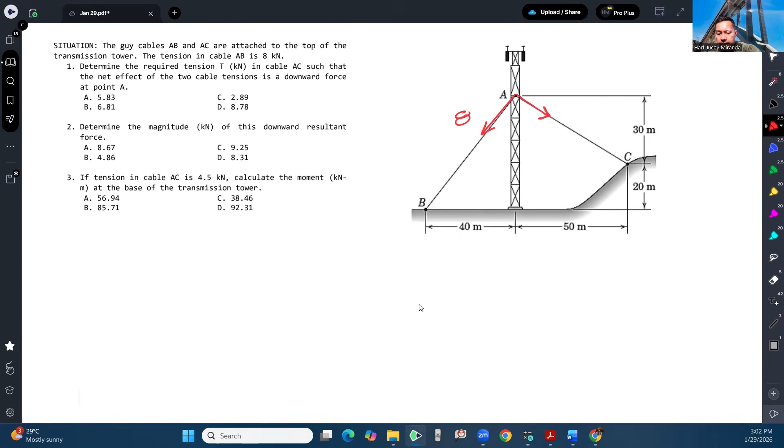Okay so una, given na yung tension sa AB, which is 8. Ang tinatanong, ano daw yung dapat na maging tension sa AC? Tawagin ko na lang na TC, at tawagin kong TB yung sa AB.

Para yung net effect daw nila downward. So ibig sabihin, ang ibig niya sabihin dito sa net effect, ibig niya sabihin dyan is yung resultant.

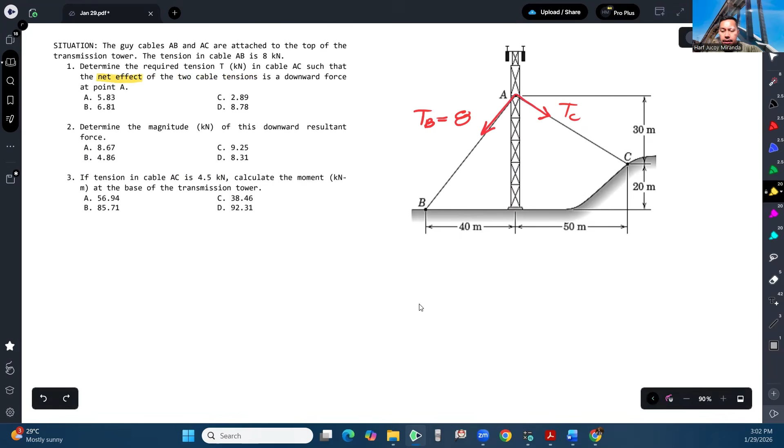Kailangan daw downward. So pag sinabi nating downward yung resultant, anong interpretation nun? Ang resultant kasi binubuo ng RY tsaka RX. So ang gusto niya downward lang, ibig sabihin gusto niya wala kang direction, ganito lang yung maging resultant.

Ibig sabihin kung ganyan ang resultant, wala kang RX. So ibig sabihin, we know that the value of Rx would be 0. So therefore yung RY mo is yung R na mismo. So ganyan yung ibig niya sabihin, and from that criteria, hanapin mo daw ang tension dito.

Okay so dalawa lang naman yan, ano? Bago ang lahat, kunin muna natin yung slope nung dalawang to para madali, mamaya mag-component, no? So dito, ang slope natin.

So we can utilize this triangle for the slope of AB. Ayan, so bali lumalabas, this can be 40 and then yung height na to is 50. Okay so ibig sabihin this is 50.

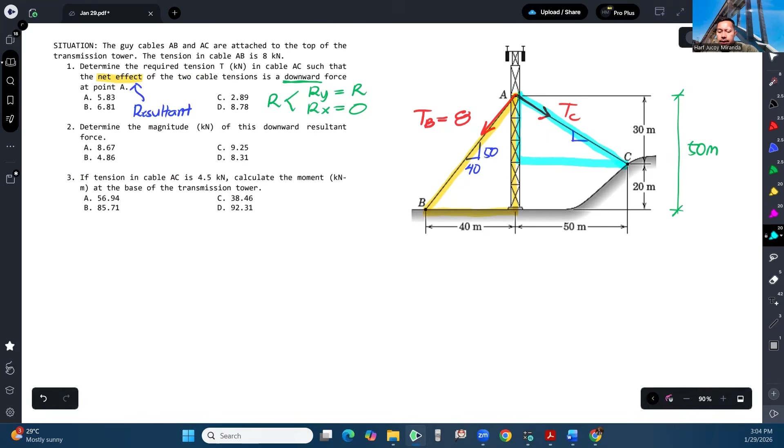And then para naman dito, we can utilize this triangle. Kailangan kasi right triangle. Okay so dito we can say that this is 50 tapos yung height mo 30. Okay tapos kunin na lang natin yung hypotenuse.

Square root ng, para dun sa una, 50 squared plus 40 squared, so 10 square root of 41. Tapos dun sa isa, 10 square root of 34.

Ayan okay? So dahil kailangan na ang resultant ay pababa, we can now already use this to solve for TC. Kasi di ba ang criteria lang naman, Rx would be equal to summation of forces X. Di ba? Eh kaso, alam na natin or we already know that Rx must be 0. So 0 na to, okay?

So assume na lang natin to the right is positive. So yung tension sa B, 8, ang X component nun ay 40 over 10 square root of 41, tas to the left. Okay? And then, para sa TC, ang X component nun would be 50 over 10 square root of 34, tapos to the right.

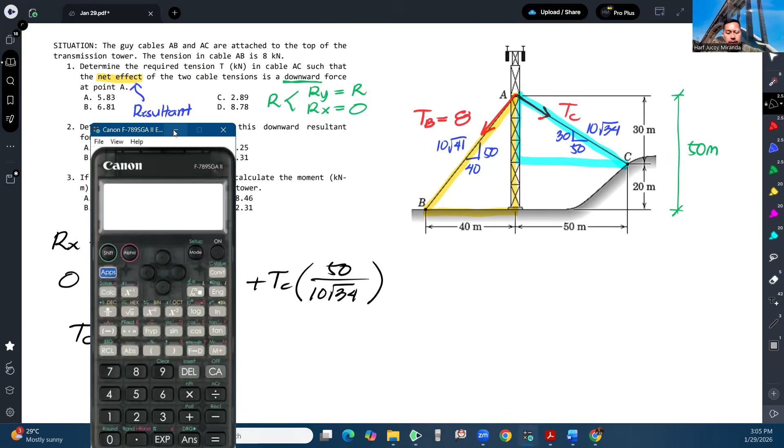Okay, and from here, yan lang naman yon, we can solve for TC. So that gives us 8 times 40 over 10 square root of 41, tapos times 10 square root, cross multiply lang, 34 over 50. Okay so that gives us 5.828.

The units is in kilonewton. Ayan, so yan yung kailangan. Okay so that's letter A.

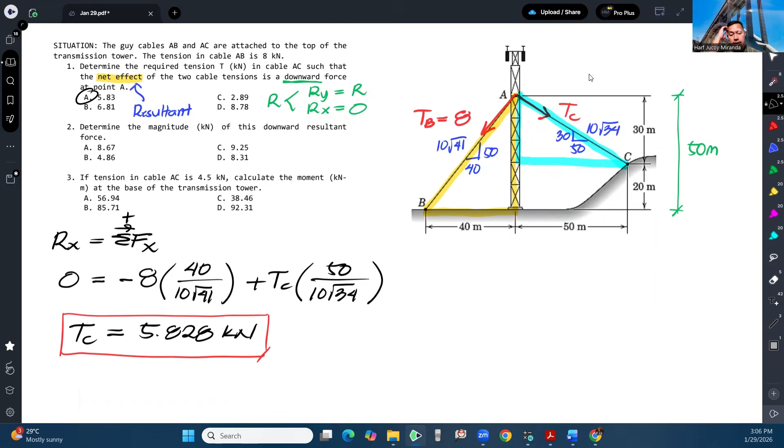Next, determine the magnitude of this downward resultant. So ano naman daw yung magnitude nitong resultant na to? So ngayon, dahil 0 nga yung Rx, yung magiging magnitude nito is completely reliable sa Ry. So kunin natin yung Ry.

So let's take summation, let's solve for Ry, that is summation of forces along Y. This time, alam na natin yung required na tension. So we will have Ry is equal to, so yung 8 muna. Baliktarin ko na lang guys, gawin ko na lang tong downward positive, kasi lahat lang naman dito downward.

Downward positive, okay? So una yung 8, downward yan. So we have 50 over 10 square root of 41. Sunod yung TC, so downward din yun. So yung TC natin, ito ang value, we have 30 over 10 square root of 34. Simple as that, no? So our RY would be

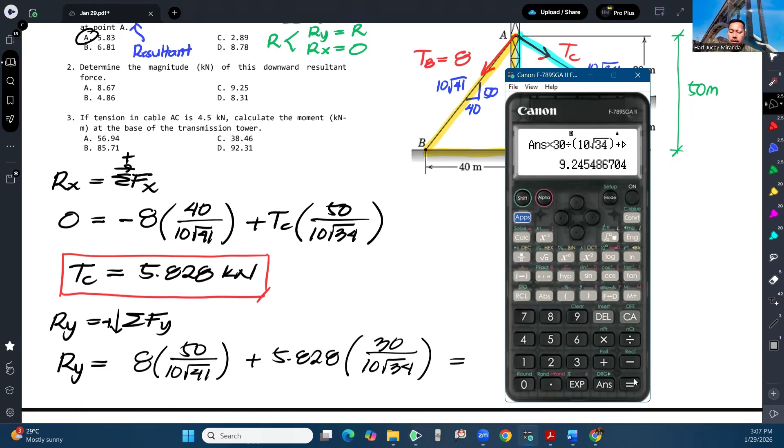Okay, so that's 9.245 kilonewtons. Okay, and yan na rin mismo yung R natin, kasi nga wala namang Rx, or zero lang naman yung Rx.

Okay, so that is letter C. And lastly, if tension in cable AC is 4.5 kilonewton, calculate the moment at the base of the transmission tower. So kunwari daw, given na rin yung tension sa AC.

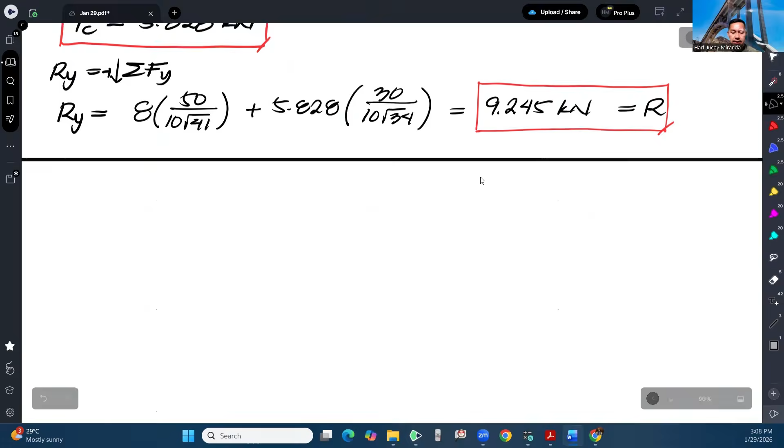Ayan, this is for number 3. So kunwari daw, the tension dito is still 8, pero yung tension dito is 4.5. Okay, so pinapahanap, ano daw yung magiging moment dito?

Sa base. Okay, so para ma-compute yun, una, we have to realize that kanina, sinolve natin si TC para siguradong downward yung resultant, di ba?

So kapag ito yung naging value ng tension dito sa C, 5.828, definitely wala kang moment dito. Why? Kasi yung resultant nilang dalawa, pababa. So ibig sabihin nun, yung X component na to, tsaka yung X component na to, nag-cancel lang. Tapos yung downward nila na component is mag-intersect. So walang moment yun. So ang magpo-produce lang kasi ng moment dito is yung X component. Ito, ikot dyan, ito naman, ikot dyan. No? Kaya nung sinolve natin si TC na 5.828, sigurado tayo na walang moment dito.

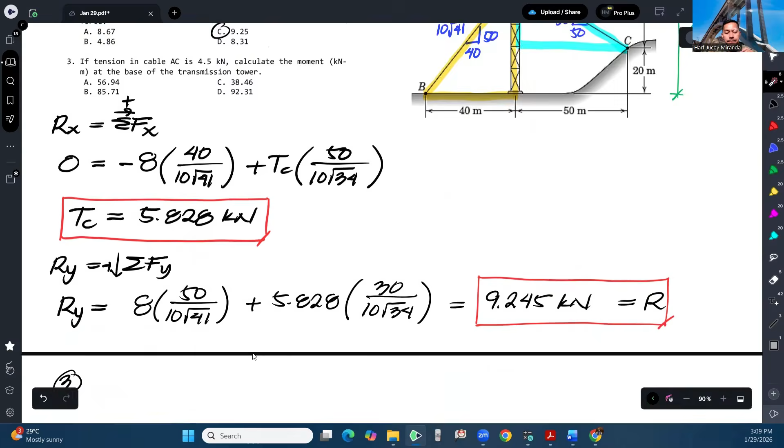Kasi downward lang yung resultant nitong dalawa. Okay? Pero ngayon, na ang sinet na value ng tension sa C ay 4.5, hindi 5.828. So dahil dyan, sigurado tayo ngayon na yung resultant nitong dalawang to, hindi pababa. It could be like this or it could be like this. And because of that, meron tayong ina-expect na value ng moment dito.

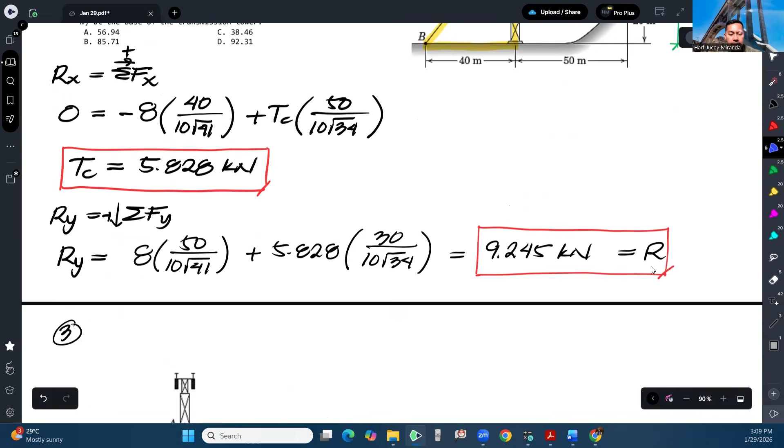Okay? So anyway, madali lang naman yan. So lagay ko lang ulit yung slope. 40, 50, tsaka 10 square root of 41. Tapos yung slope dito ay 30, 50, tsaka 10 square root of 34. So, ganyan.

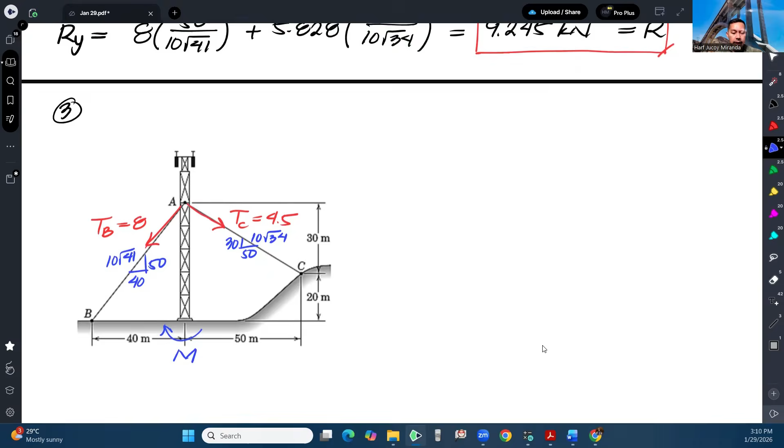So now, taking moment about this point at the base. Okay, so let's take summation of moment at the base. Assume natin na counterclockwise is positive. So yung moment na yan, inassume ko na clockwise o negative. Tapos, kunin natin yung x component nito, nitong 8.

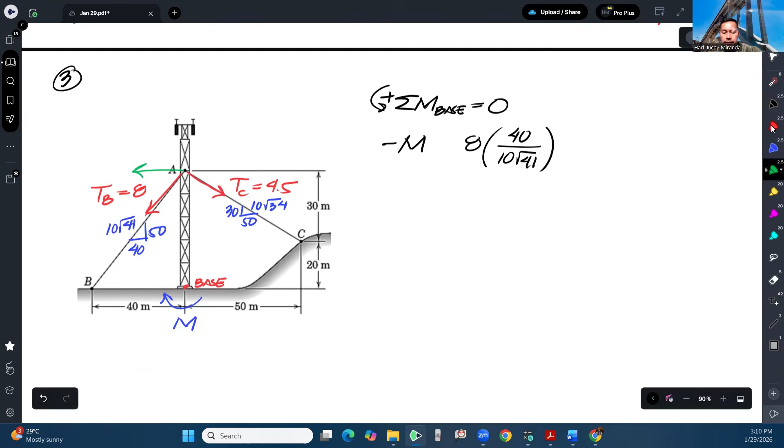So that is 8. Ang x component niya ay 40 over 10 square root of 41. Okay, tapos ang moment arm niya, bali ito. Ito, which is, ito, 50. So yun yung moment arm niya. So times 50. Okay, tapos ang rotation na ipoproduce nito ay counterclockwise.

So gawin natin plus. Next, we also have the x component here. Diba? So yung x component naman yan is 4.5. So times 50 over 10 square root of 34. Ang moment arm niya, apparently, 50 rin. Diba? Okay, tapos ang rotation na ipoproduce niya ay clockwise. So this is negative. Okay, and that is all equal to 0.

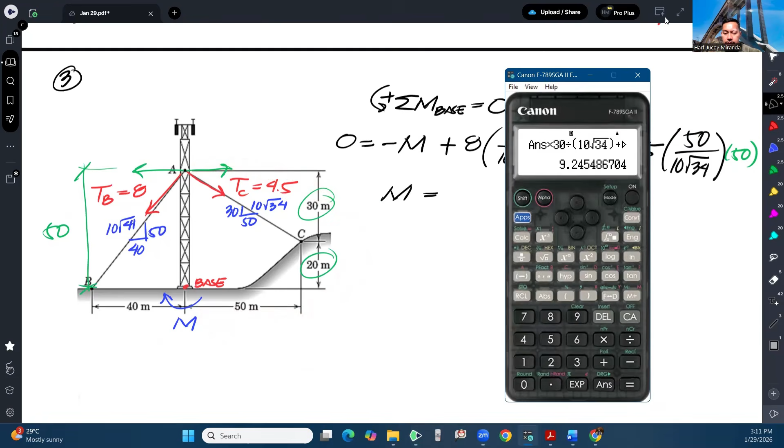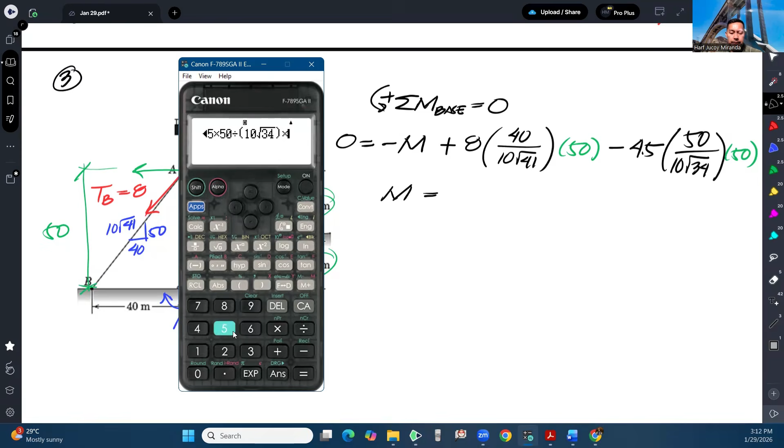And from here, we can solve for the moment. And that gives us 8 times 40 over 10 square root of 41 times 50. Okay, that's minus 4.5 times 50 over 10 square root of 34 times 50. Okay, so that gives us 56.94.

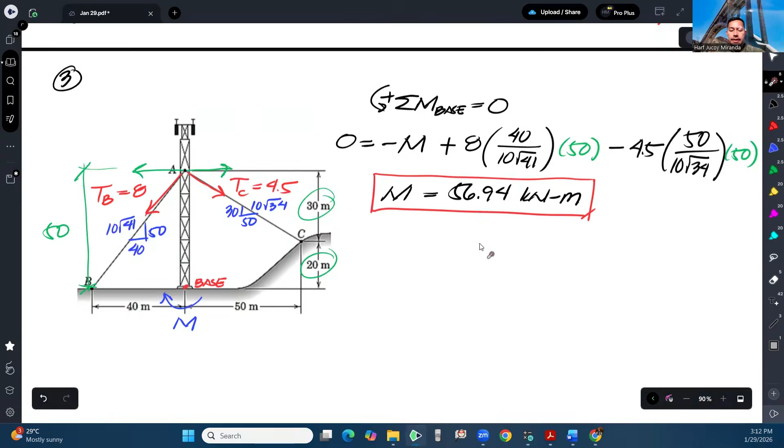Anong units ito? Kilonewton meter. Okay? So nag-positive yung nakuha kong sagot, ibig sabihin tama yung assumption ko na pag ganito yung reaction, moment reaction. Okay? So therefore, the answer here is letter A. And that's how we solve this problem.